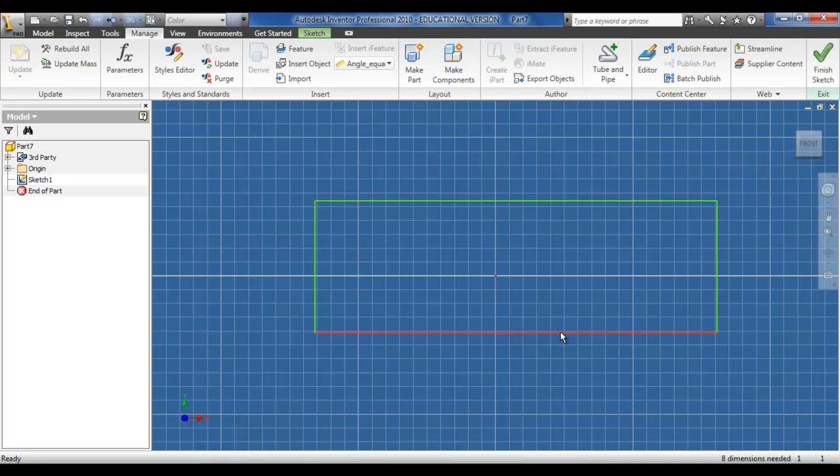So I've just set up my first few parameters here now, and widened the cell there so you can see everything. This involves the rail length, so all the rails, the top and the bottom, are the same length. The top rail height and the rail thickness. So I just saved that there now. I'm just going to link to the Excel sheet. I can insert these dimensions here now, which go back to the list parameters menu and relate to the Excel sheet.

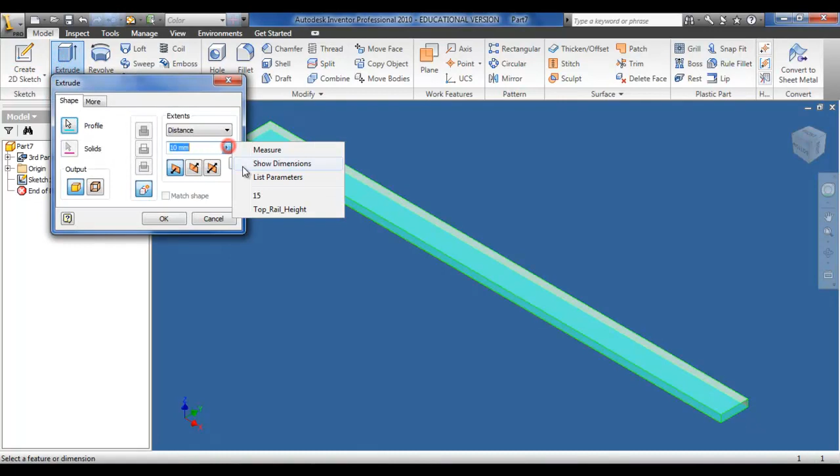I can extrude this now as well as the top rail height. And I can save this part of the drawing. I'm now going to insert the different dimensions for the groove in the timber itself to take a glass panel in the centre of the door. Now that Excel file has been saved, I can create a new sketch to create the actual groove on the bottom of the top rail.

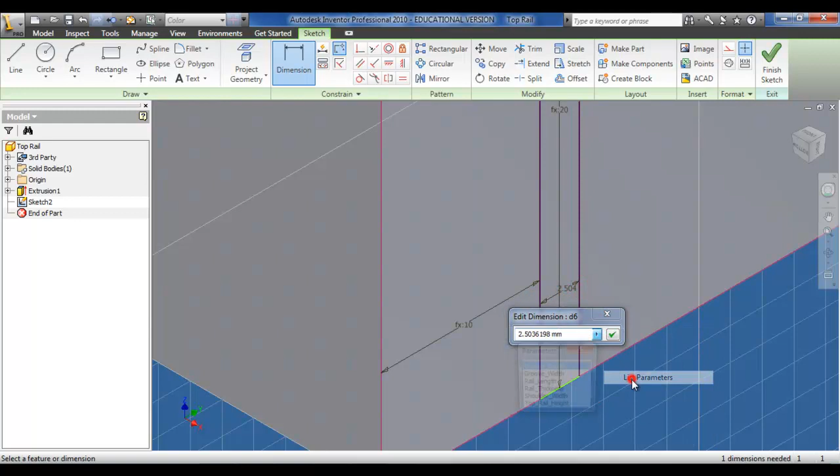I'm just going to draw a small rectangle first, because I don't want it to constrain itself to another point by accident. And now I can actually apply my parametrics. Finally, there's a third dimension. And now I have a rectangle that I can use to create a cut through the entire length of the section. So just select through all and OK.

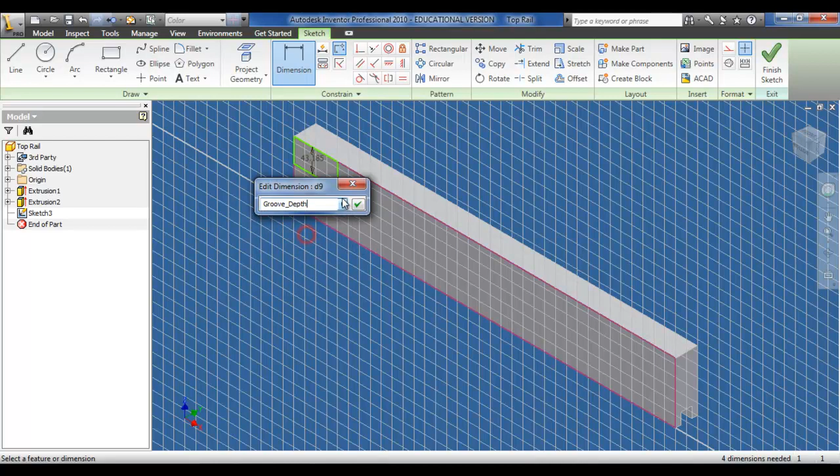I'm now going to create a shoulder on the top of the joint. This is basically so the joint will not extend to the very top of the stile. So for this I'm going to use the same as the groove depth, which is 20mm. And now I want to put in the length of the tenon, which will be the same as the stile width.

So now I go back to manage and update my parameters. Now I can put a dimension on the width of the rectangle, which is going to be the length of the tenon. In this case it's 110mm. I do the exact same now on the other side of the head rail. I could copy this section across, but I'm going to create a new rectangle for clarity of this tutorial. The exact same here again. It's 110mm by 20mm.

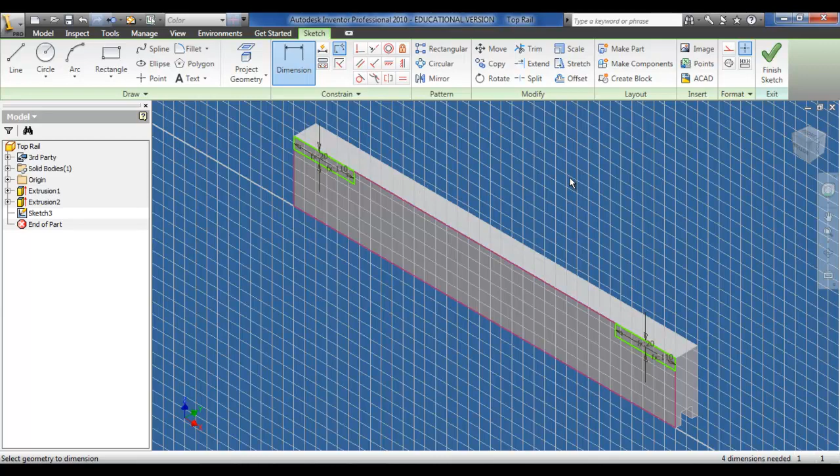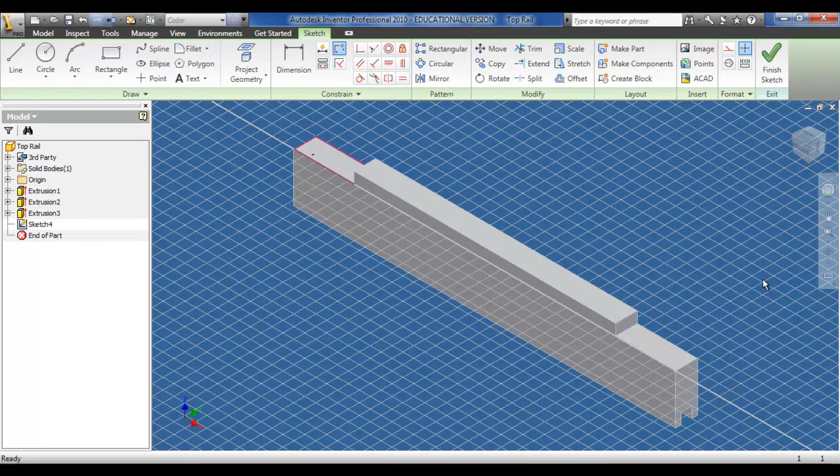I can now finish the sketch and extrude a cut through these two parts. Once again, just cut and through all. The next thing I want to do now is actually cut out the tenon. So I'm going to take a small bit off the left hand side and the right hand side. So I'm going to draw another simple rectangle. Make sure it doesn't constrain itself to anything else. And now dimension this accordingly.

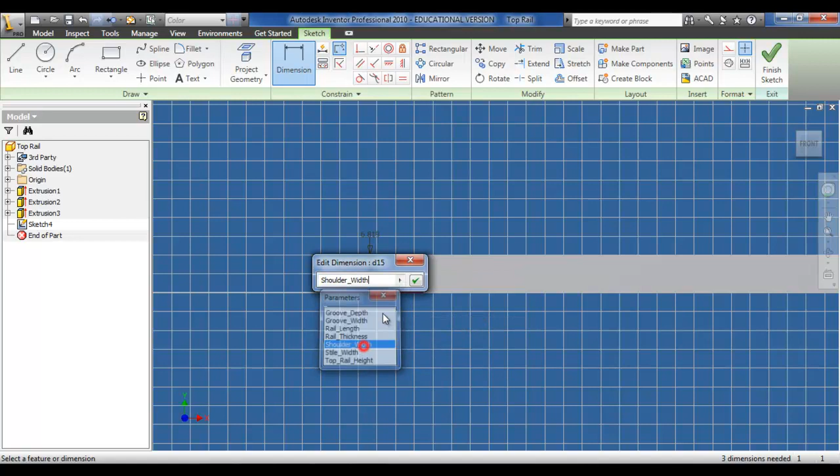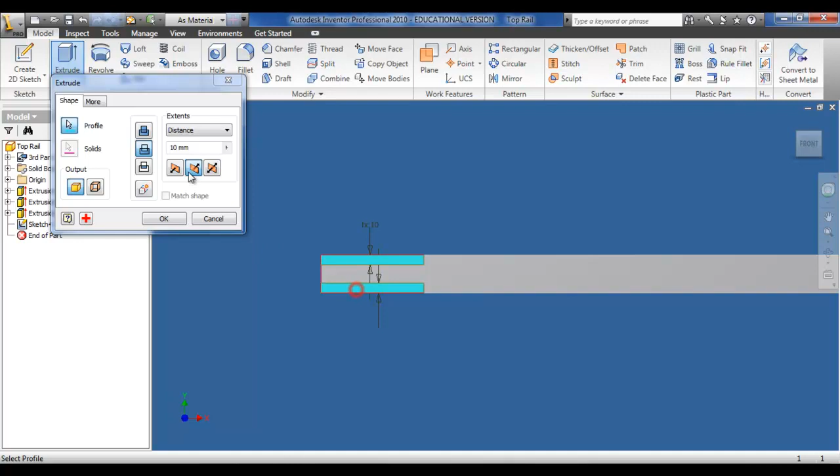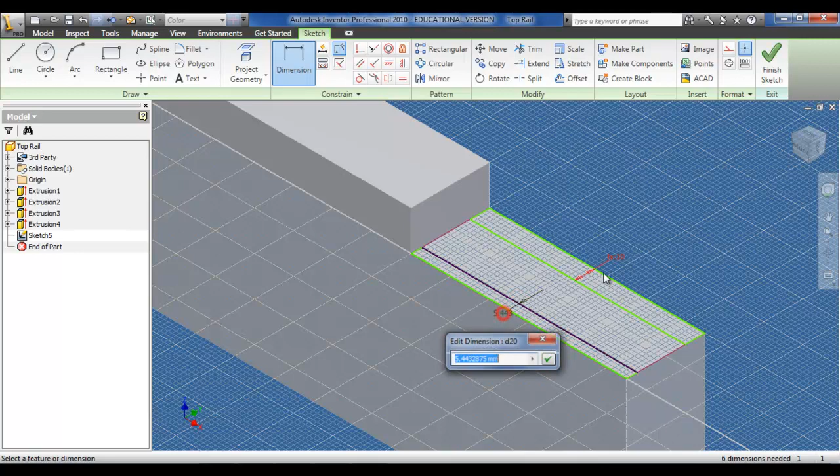We now finish the sketch and I can cut these two rectangles through all, click OK. I'll do the exact same thing on the other side. Since the rectangle is the same length as the face below it, it'll automatically be constrained in length, so it's just the width that needs to be dimensioned. So that's the same as the other side. And now you can do the exact same thing again, finish the sketch, extrude and cut the two rectangles through all.

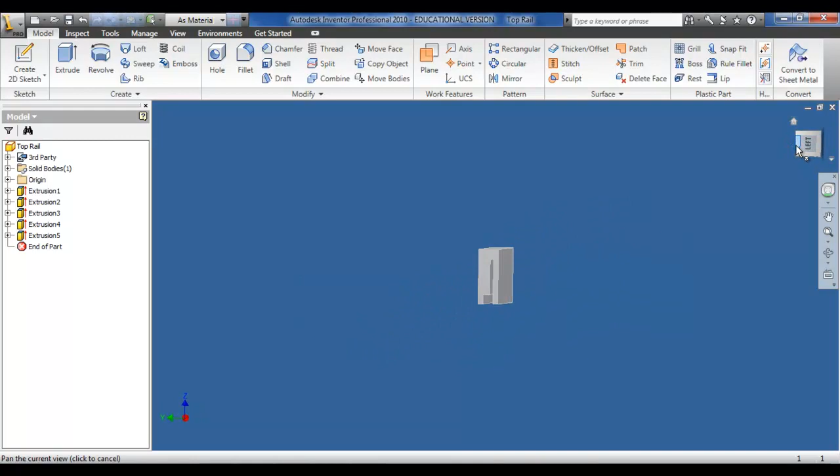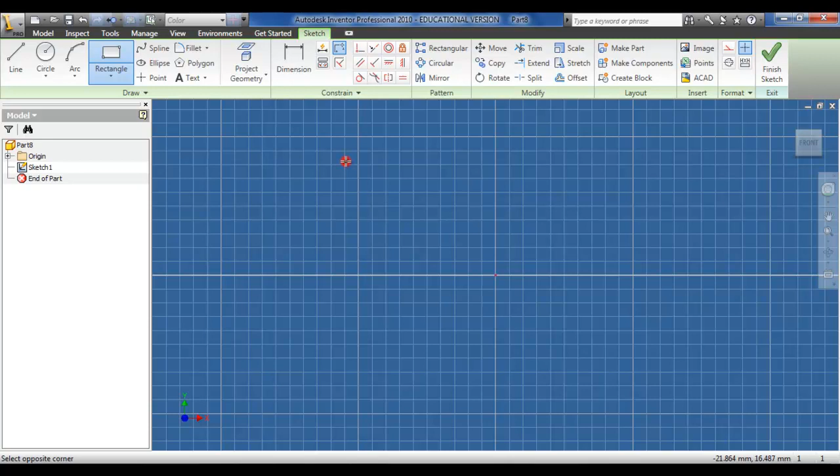So at the moment I have my top rail, it has the groove in the bottom, it has the two tenons, one on each side, and the center peg section. I can now save this part. Now I can create a new part. And this is going to be the stile. So I'm going to have to add a few more parametrics. Once again, I'm going to incorporate some formulas into the Excel sheet.

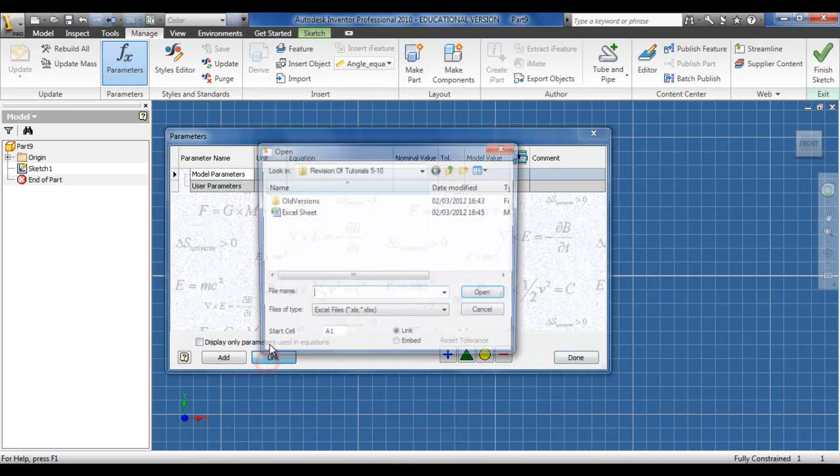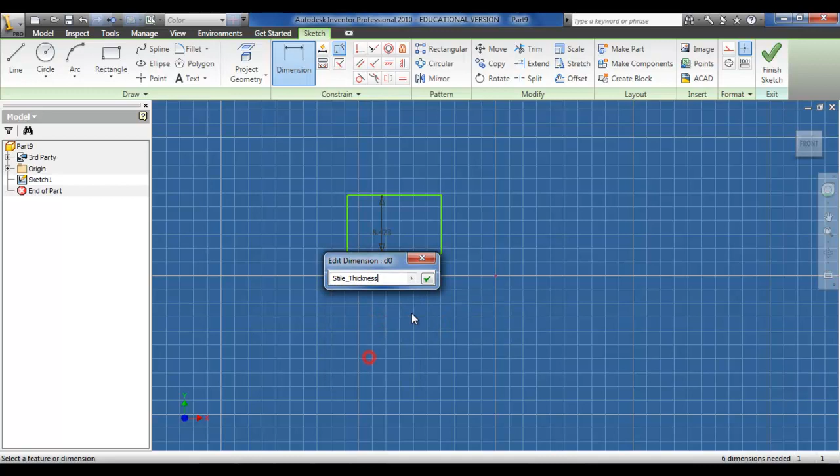Back now, I'm going to create another standard new part, link in the parameters, link it to my previous Excel sheet, and when this imports just click done. So now once again I can draw my rectangle in the sketch mode, dimension the thickness, now dimension the width. Finally, once again, I can finish the sketch and extrude to the length required, which is the same height as the door.

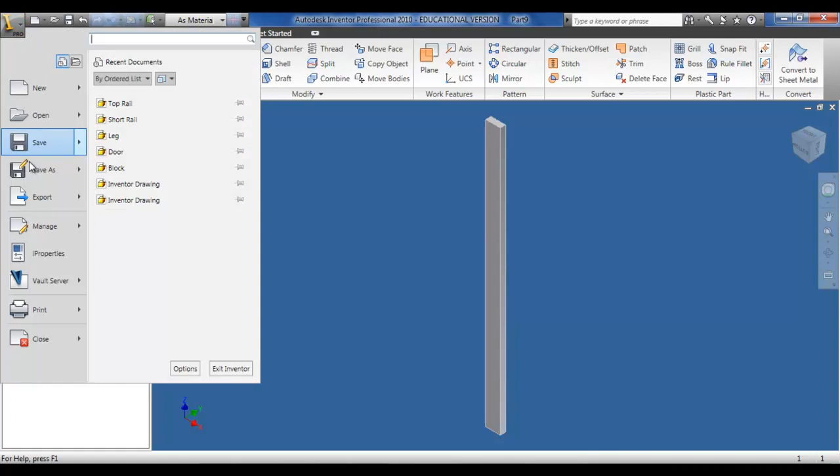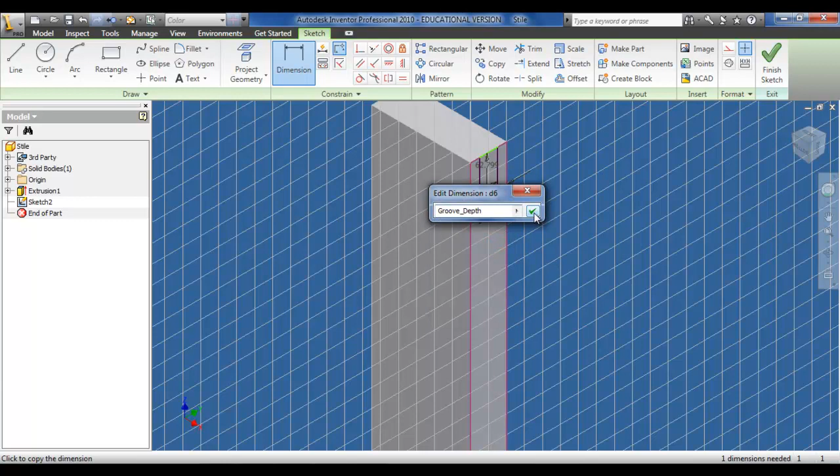Now that the stile has been saved, I need to create the mortises to accept the tenon from the head and the sill. Since the tenon on the top rail did not start at the very top of the rail, I'm first going to create a rectangle to represent the section that is not to be mortised out from the stile. If you remember, this is the same as the groove depth. And now to this rectangle, I can constrain a new rectangle.

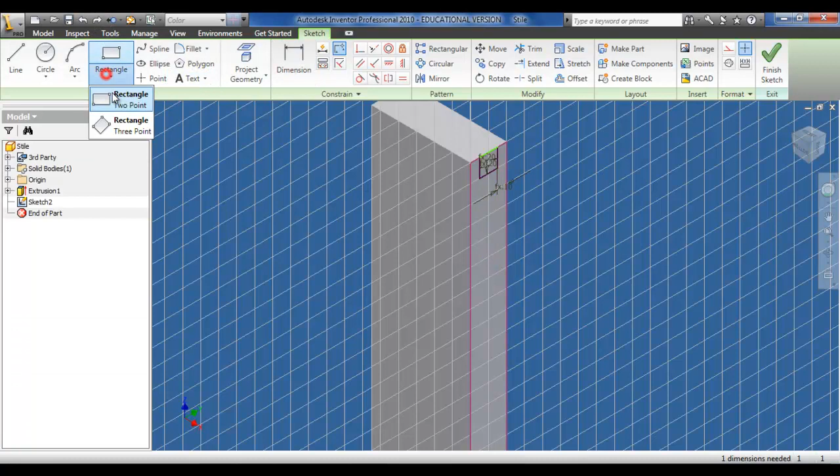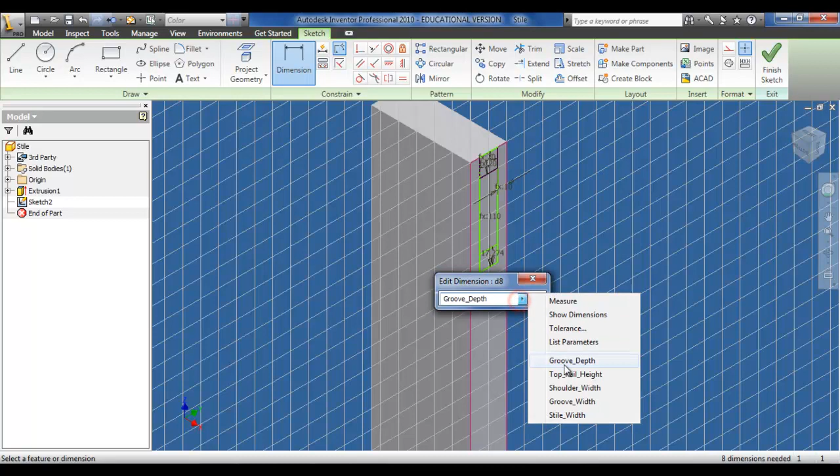First I was going to place it in the bottom like this, but after some consultation I decided to place it from the very top. The main reason is because I'm missing a parameter for here. So I've undone that, drawn a rectangle from the very top, and now this is the height of my top rail. And now I must remove the groove from the bottom. So draw another rectangle, constrain to the previous one, and dimension that my groove depth. This is now the stile with the mortise created on the top.

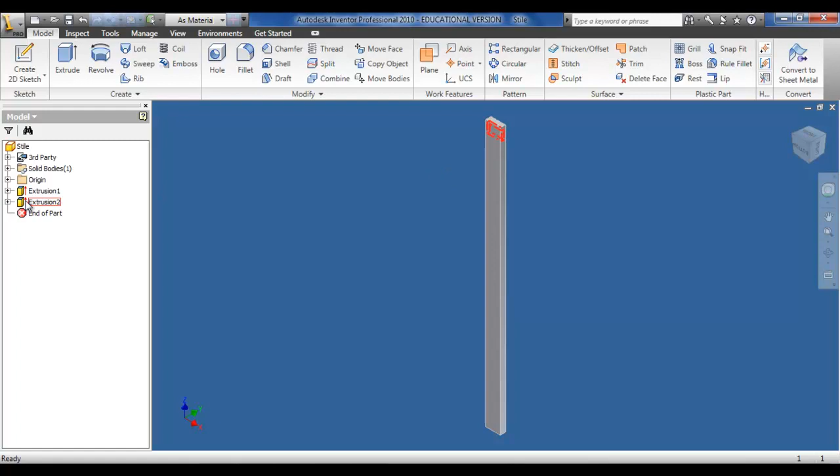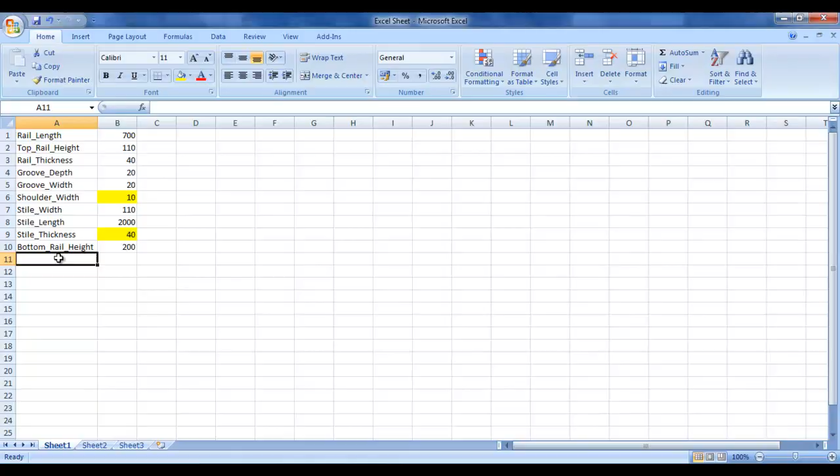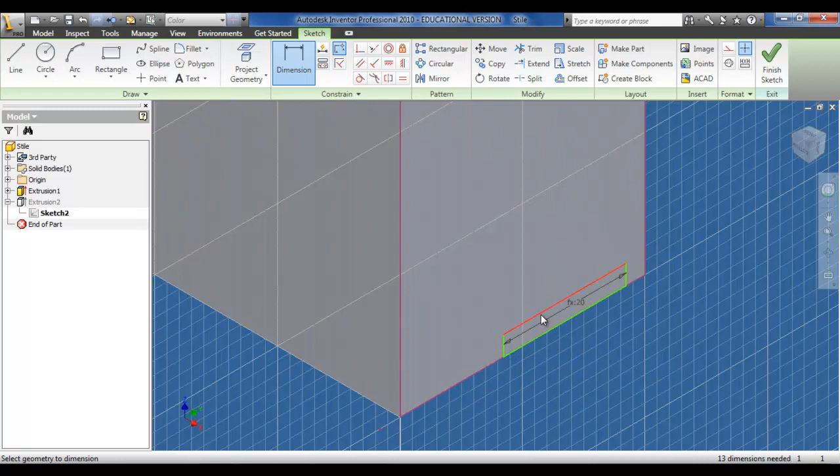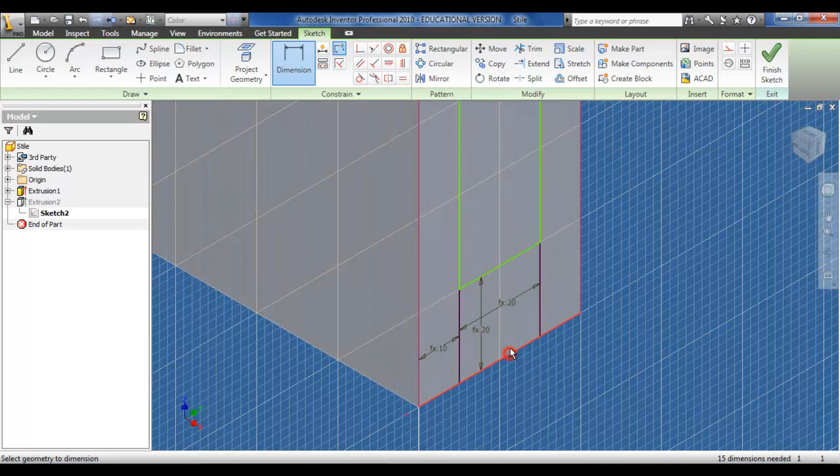So the next thing I'll do here is create the mortise on the bottom. These are going to require a different set of parametrics since the bottom rail is higher than the top rail. When that Excel sheet is saved again, I just update the parametrics. And now I'm ready to draw another few rectangles to create a cut using the extrude command on the bottom of the stile. Once again, I do the exact same procedure as I did on the top of the stile. Once again, this top rectangle is the actual area that's going to be mortised from the stile.